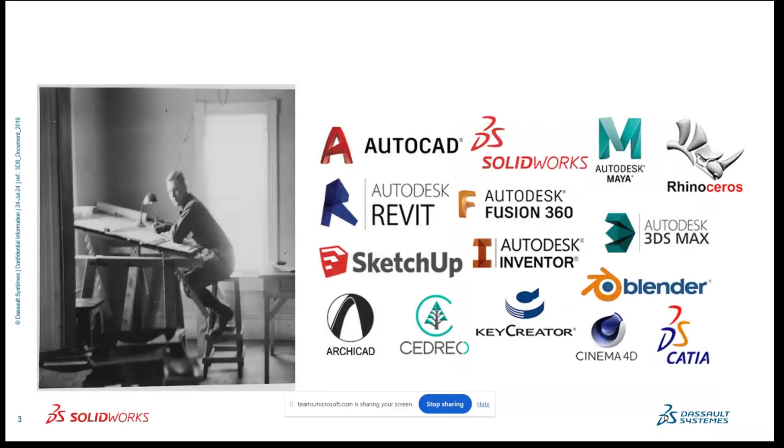Before 1950, industries required technical drawing, so we had a drafter and a drawing board. Around 1980, the pace of engineering drawing increased, so we required 3D applications. But now we are heading to a more hybrid work environment. To meet this requirement, Dassault Systemes has come up with a brand new technology, 3D Experience. Let us quickly analyze the challenges faced by designers in the current working environment.

It may be in modular designing, that is, day by day product complexity is becoming high. Our clients and customers are demanding high quality products. We also notice that there is a shifting work-life balance. So right now, team mobility has become a great challenge.

That is collaboration within the team. Handling of information and design reuse has always been a hectic task. Apart from that, data-driven decision - management always felt the need to have a track on design work and to take an informed decision on a real-time basis, and to cut down non-value-added tasks. So these are the challenges we are facing.

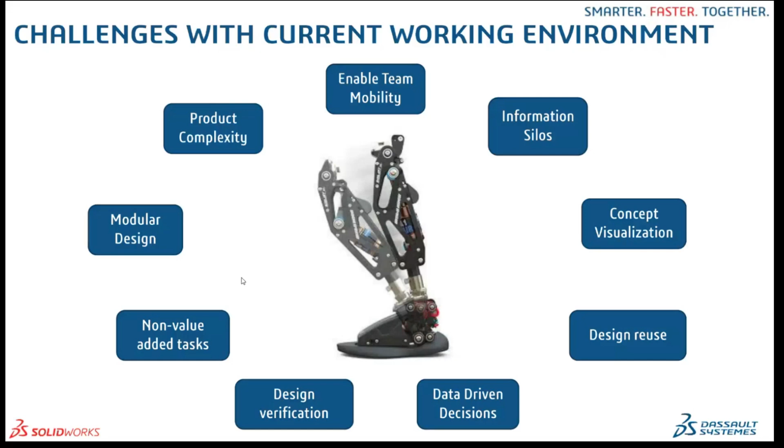To address these challenges, what I am going to show you in the coming session is how to bridge the gap between these challenges to meet our requirement.

Hi team, I am Manu Prasad from Logical Solutions. Today my webinar is all about exploring the 3D Experience platform.

For a better analogy, I have taken an example between what is a product and a platform. A few years ago, we were using different products to meet our daily tasks. For example, we were using a Nokia phone for calling. For BlackBerry, we used to depend on it for storing our data, which was secure at that time. For music, we used to have an iPod, and to capture images, we used to have Nikon cameras.

Now everybody has shifted from product to platform. All we require is to either select the Apple Store or Google Play. On the need basis, we will download the application and use it. So platform is the future.

Let us take a moment to review how design tools are used today. If you look at the design products, right now for concept design, we may be using Rhino or Google SketchUp to make the concept design. And for data management and task management, we will again use third-party applications like email or Google Drive.

Or Dropbox to communicate and transfer data between team members. And for detailed designing, again we'll come back to SolidWorks or depend on other CAD applications.

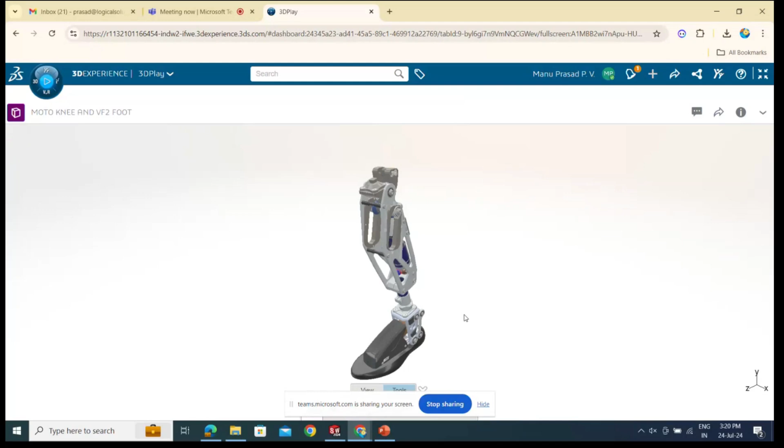So here he can not only zoom in, zoom out, rotate, all sorts of operations he can do. He can use measurement. For example, if you would like to explode this component, all he has to do is just drag the slide to the last component. He can view his model.

Suppose after viewing he found that some additional modification should be done. What he will do is just click on markup and create a markup here, and make a note that says please look into it.

After creating a markup like this, he has the ability to share this markup to his community. He can create a community or a one-on-one conversation. After creating the community and sharing it, he can select which community he would like to share it with, give a title, a review, and just click on publish.

Since the designer has seen the model, we can see that he noticed something has to be done. He made a markup and posted it in the community.

Now what happens is all the members get a notification that the manager has updated something in the community. So what they will do is open this community and open this application. Here they get to know that the manager has said something.

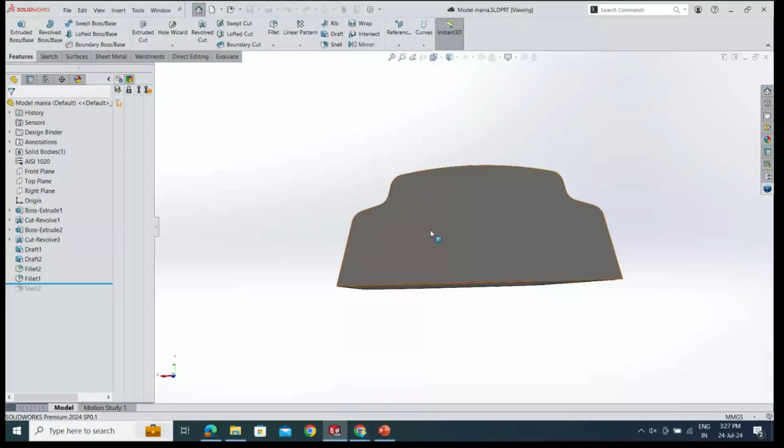Before that, I would like to show you how the revision management and all are satisfied with respect to the model. So this is the model which I have created, and after making some changes to it, if I am going to save this model to 3D Experience, you can notice that here the revision is A4.

After making changes, it will ask me to click on revision management, and after saving, it will be updated and it will take a new revision.

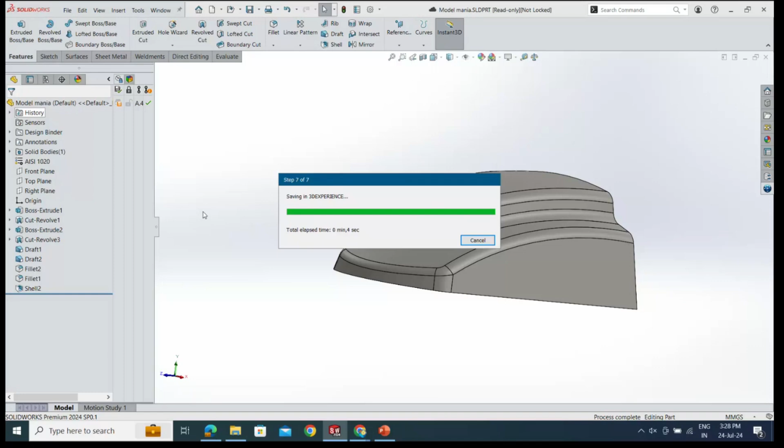We can see that the revision has been changed. If the manager feels like looking into the previous revision, he can go ahead and change the revision from the collaborative task. So this is that simple—working in 3D Experience is that simple.

Now, as I mentioned, Mr. Vignesh, the designer, is working on his model assigned by his manager. Now what he does is he can also search for the relevant tabs. We use very good search calculations behind it.

So he will go to in-work, and from here he will be opening this task. From that, he will read everything assigned by his manager, and he will also look at how much time the manager has allotted to him.

What he does is directly he can open the model from here, either by clicking on Open with SolidWorks or by just drag and dropping this model to the SolidWorks environment. We can see that this model is regenerating in the SolidWorks application.

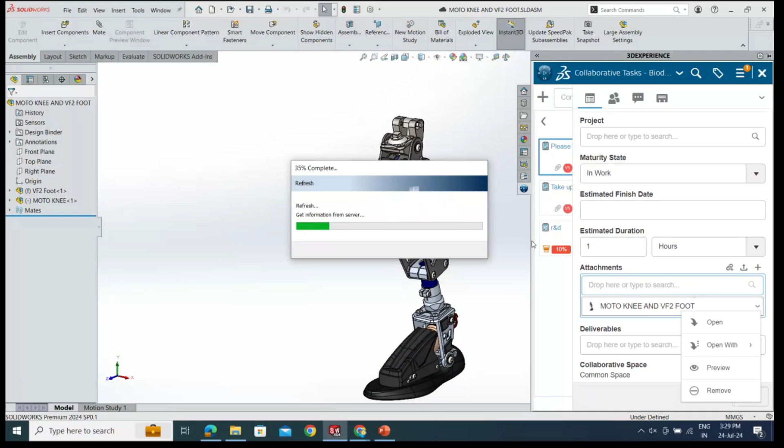We can see how quickly this model has been regenerated from the cloud, downloaded from the cloud to this desktop version. And remember, I said that we can do all sorts of operations using 3D Experience also.

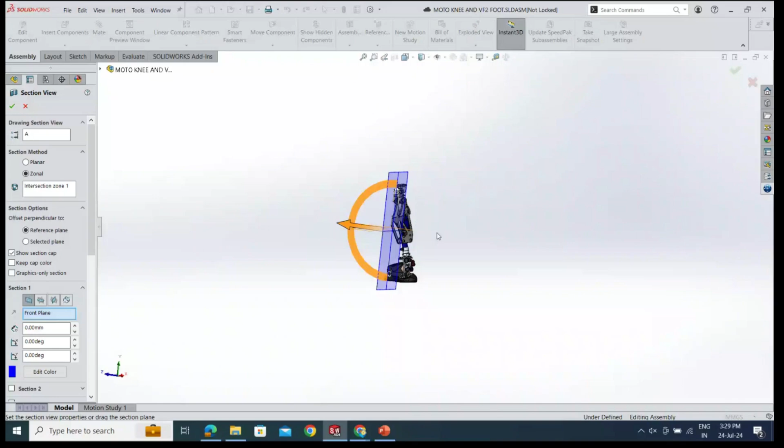There is no change in that. Apart from that, I would like to see the cross section of these—just with one click, I can make the cross section. And if I would like to change the display states, I can still go ahead and use that. What I'm telling you is we can do all operations that we do in SolidWorks. There is no change in that.

Now the manager and the designer start working on this, wherever the manager told him to do the work.

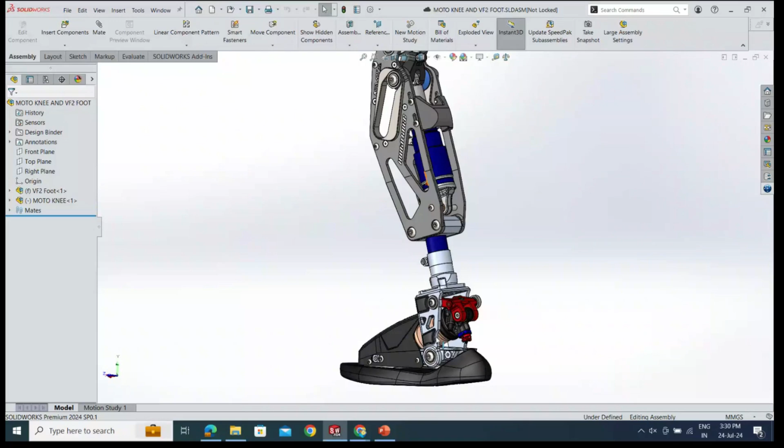Now let us go to the cloud environment. Let us look into a few other aspects of the cloud. See how quickly I'm minimizing it and moving into the next tabs.

So I also mentioned that we can use xDesign over browser. Now the manager got some time in his work environment and would like to create a new component for that assembly. Notice we are not using SolidWorks, we are using a browser-based application to create the model. I would like to show you how we can create it in the browser. All we require is just a browser and net connectivity, nothing else. We can also do it on a mobile phone or tab.

Just click on new component. It will automatically take its name, but if required, I can change it. It is asking which workspace or folder I would like to save it in. After that, click OK.

So it is generating the space with the folder name. We can see that, as in SolidWorks, we have by default three planes here. What I will do is right click on this plane and activate a sketch on that plane.

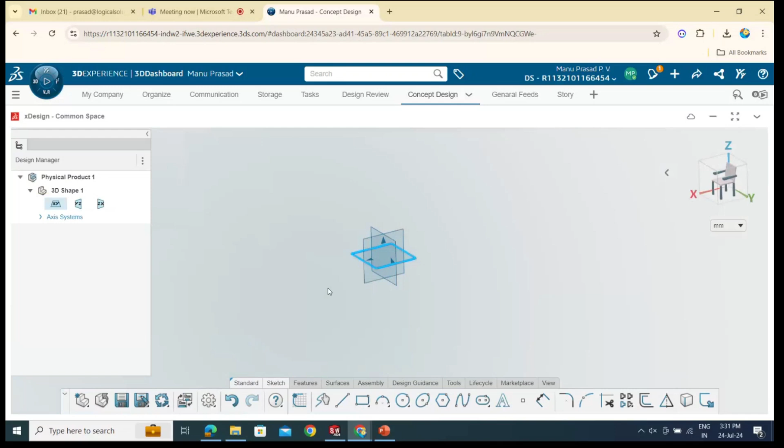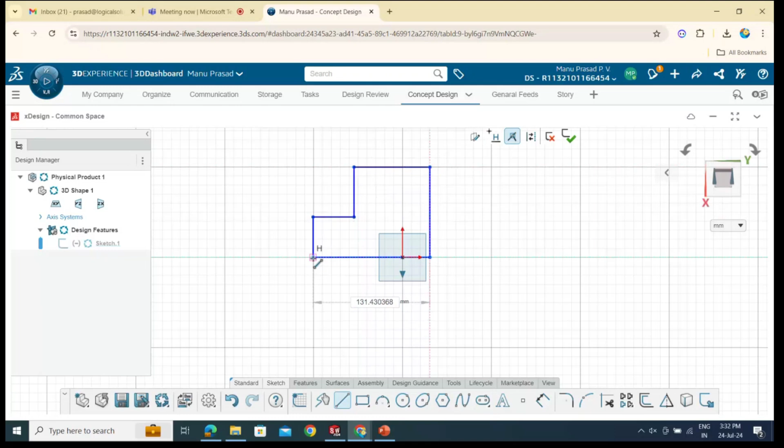After activating the sketch, I can go to the sketch environment. For example, if I would like to create a line command here, using the drag and drop method, all sorts of operations which we do in SolidWorks we can perform the same here in the 3D Experience platform. The best part is we can also use mouse gestures, and we can use smart dimension with just one click.

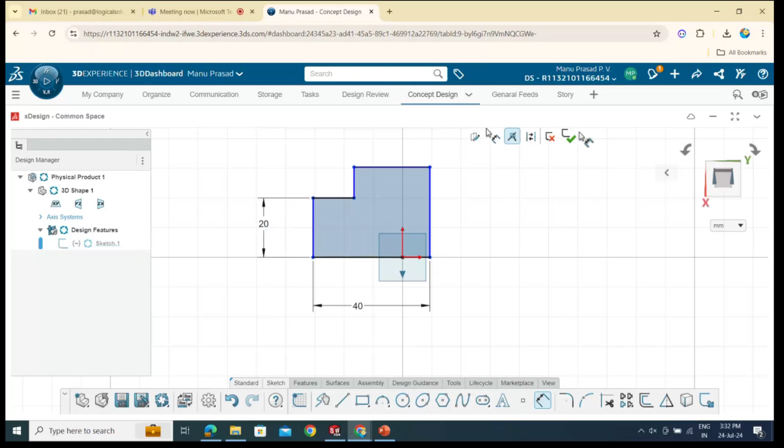We can also notice that the line commands use this color configuration, so just by looking at the color we can see which entities are fully defined and which are underdefined. We also have a confirmation manager, a triad, and all sorts of information here.

Once I've done my sketch, I can also go to feature. In feature, we have all sorts of features like revolve, extrude, loft, fillets, hole wizard, patterns, etc. Not only this, I also have other features like surfacing, assembly, design guidance, lifecycle, etc.

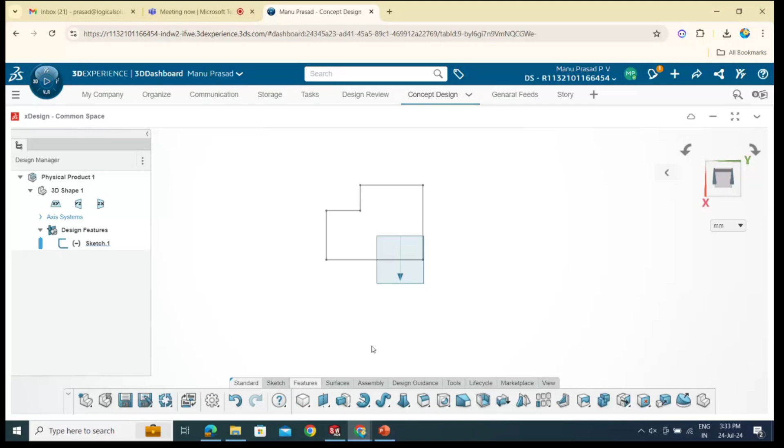Now I would like to go to a feature and add an extrude or revolve base, or revolve cut to it. All I will do is select an extrude and click OK. Just with one click, I will get the model. We can also see that...

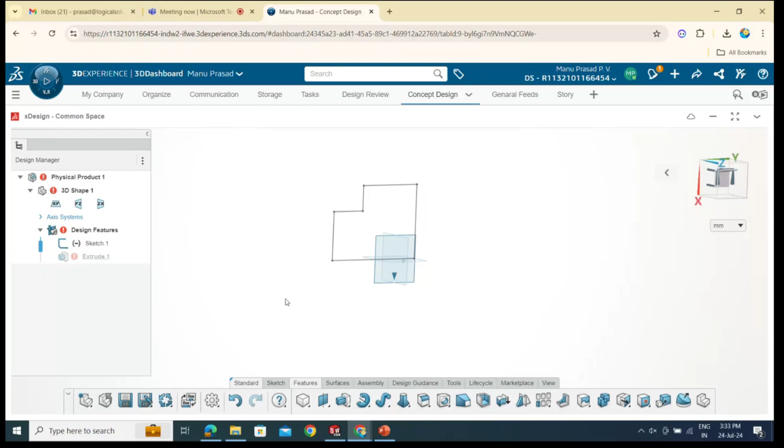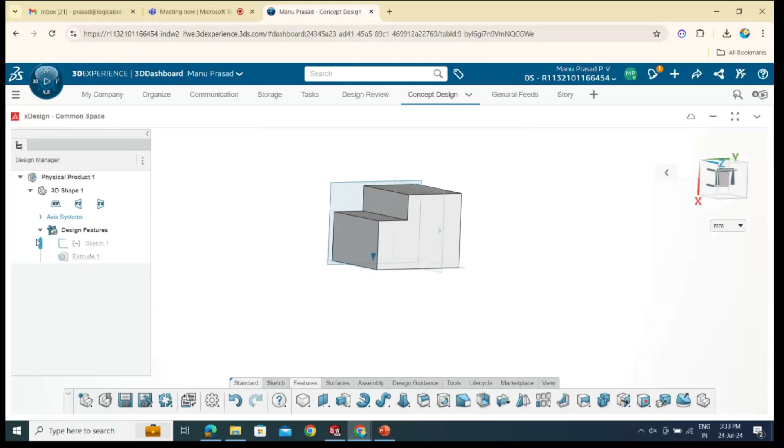There is a feature manager design tree here. Similar to SolidWorks, we have a single feature manager design tree where we can see whether my sketch is fully defined or underdefined. Just with this indication, I also have a rollback bar here. I can roll back and do the design study also. If not required, I can close it too.

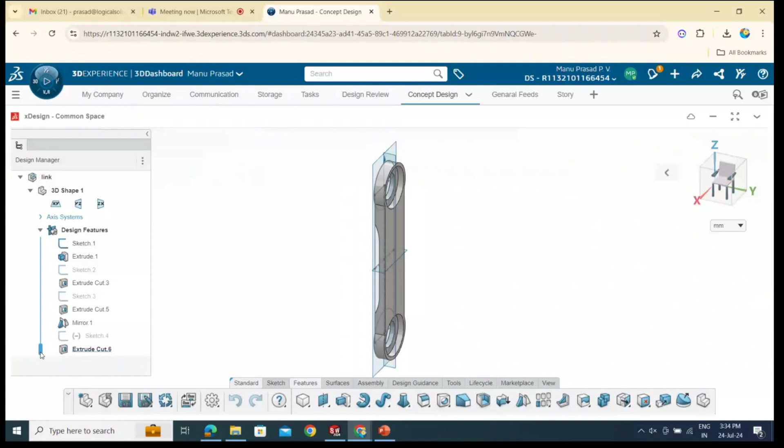So the manager has already created a link so that the designer can add this link to his assembly and part. We can see that the manager created this link using a sketch, then did an extrude. In the similar way, he has used all the features and created this link.

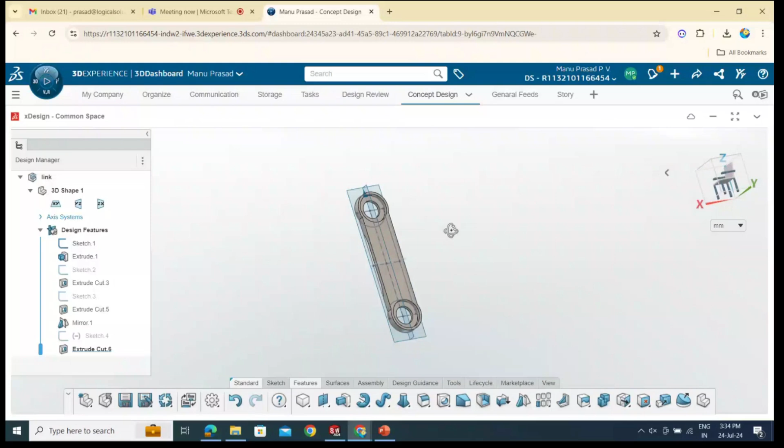Now he would like to share this document with his designer. Previously, to share this document, he had to open his email, add an attachment, and send an email. He had to call his designer to say he has updated or sent an email, and ask them to download it to a local system and use it. But now...

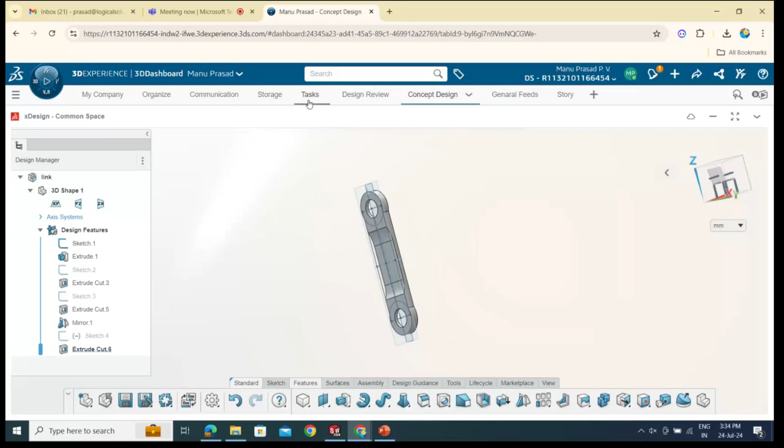Just with a few clicks, we can go ahead and assign this design to his designer. All he has to do is open the task, and we can make a quick search for this link. The manager quickly searches for the link, and this link appears. Just he has to do is drag and drop it to the allocated...

Attachments - just drag and drop. Not only one or two, we can add multiple attachments in one go. Just click on save, and this will be updated in the collaborative task. Now the designer will get a notification that the manager has added some component, and the manager can also include a detailed description of where to add it, how to add it, how much degrees of freedom should be given. All this detail he can add, making a description of that.

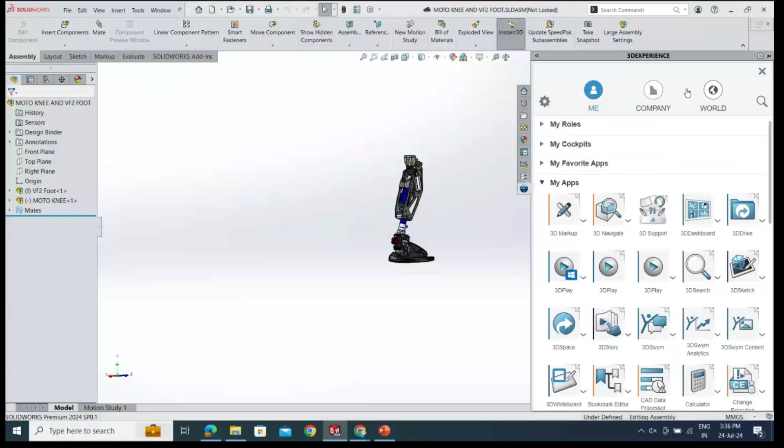So now I would like to go to the SolidWorks application. Here, the designer will open this component. In the 3DEXPERIENCE platform, he will search for the task, open the task, and quickly go to the attachment section.

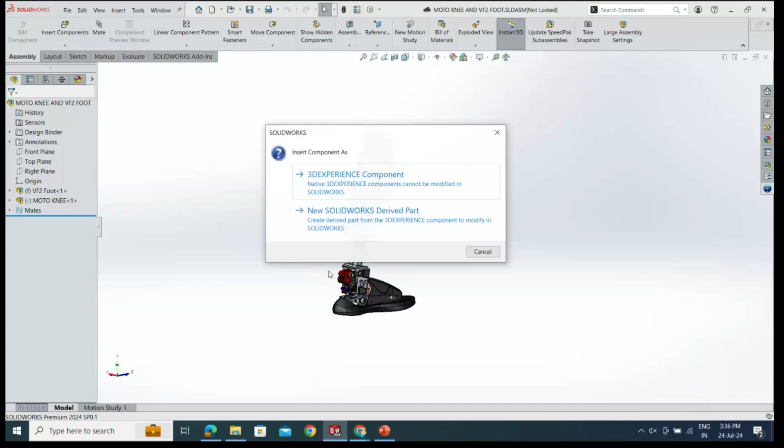In this attachment, we can see that the link has appeared. So what he does is just drag this attachment into the assembly environment. We can notice that even though we have created this in the 3DEXPERIENCE platform, we can also interact with that file in the existing CAD software as well.

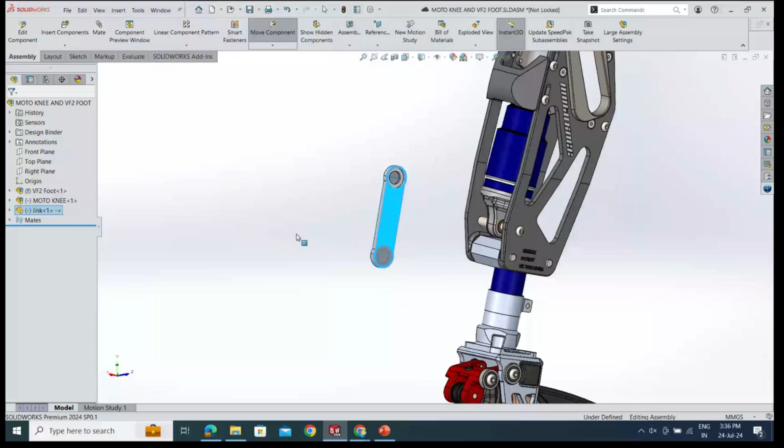As I mentioned, all operations in SolidWorks can be performed here too. Now I can move this component. We also note how intelligently SolidWorks calculates smart mates and smart components. So what I do is select any of the edges, and using smart mates, I drag this component to the relevant location.

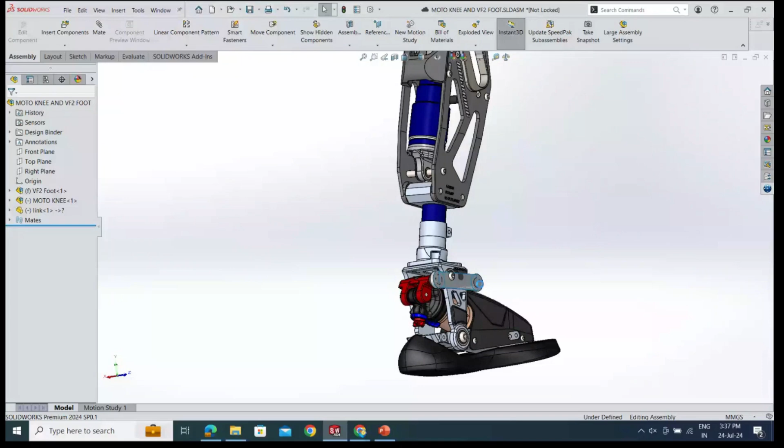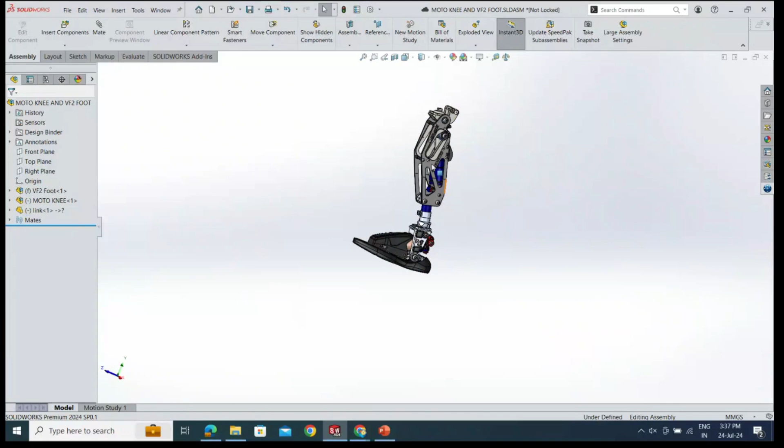In a similar way, I can also select other edges and drag and drop here to the location where I would like to place it. So with just a few clicks, I can start working on this model without any issues. Even though we imported it from the cloud, all the assembly mates will be satisfied here.

So parametric designing is one thing. Similarly, apart from parametric, we have surface modeling. We can work with weldments, mold tools, and so on. I would like to show you that briefly.

So here we have an option to switch from parametric to surface modeling, or if you want to use sheet metal, we can use it, or XMOD, or weldments, all within a browser. No need to have any hardware components for this.

In a similar way, I can also use various tabs to perform my daily operations. Here we have added a feed, so if I'm interested in any design blocks, I can add the relevant block and look into these blocks in my free time. And here I have added a metric reader, so if I have any data like .csv or XLSX, or any physical data, I can upload that document here and get a pie chart or different types of charts.

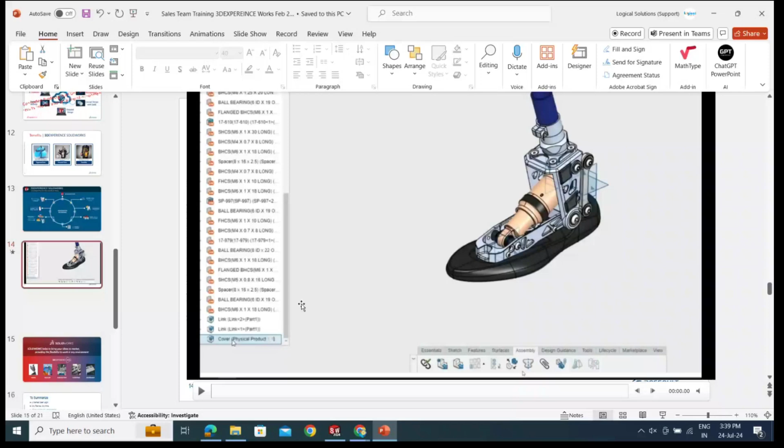So here I would like to share a quick glimpse of how we work with sub-D modeling. This is what sub-D modeling looks like. What we'll do is open the sub-D application. Sub-D modeling is nothing but working with clay modeling, it's similar to that.

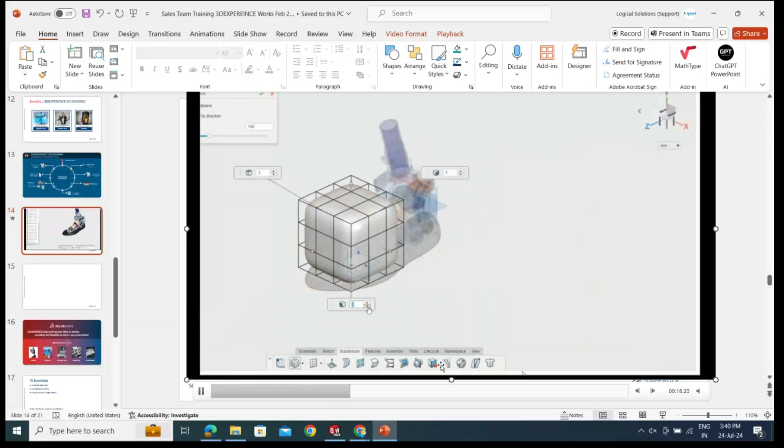All we have to do is select how my sub-D should be. After selecting the sub-D, I can drag and drop it in the relevant location. Using the coordinates and such, I can quickly select the edges and start working with them.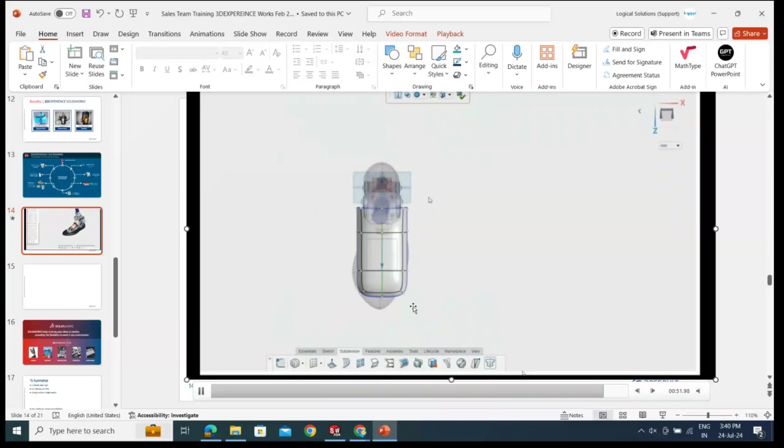Here we do not have any dimension restrictions. Just without any dimensions, using the triad, we can shape the model as per my requirement. With just a few clicks, I will get the model as per my requirement. It's that simple.

So what I have explained so far is only about design aspects. In a similar way, we have the 3DEXPERIENCE platform for simulation. We are using the world's renowned solver, Simulia, for simulation, and we also have manufacturing applications, marketing applications, governance applications, all sorts of applications in the 3DEXPERIENCE platform.

So to quickly summarize, what is the 3D Experience Platform? It is a named user login, meaning with just a username and password, we can log in, anytime, any device. It does not have any serial number, so we can log in on any device at any time and start work.

And since it is a cloud-based platform, it always works on the latest version. All the bugs will be fixed automatically in the backend. No need to worry about the data, no need to worry about saving, it all gets updated in the cloud.

To sum it up: one platform, endless possibilities. Hope this session was informative to you, and we are happy to close it. Thank you very much.